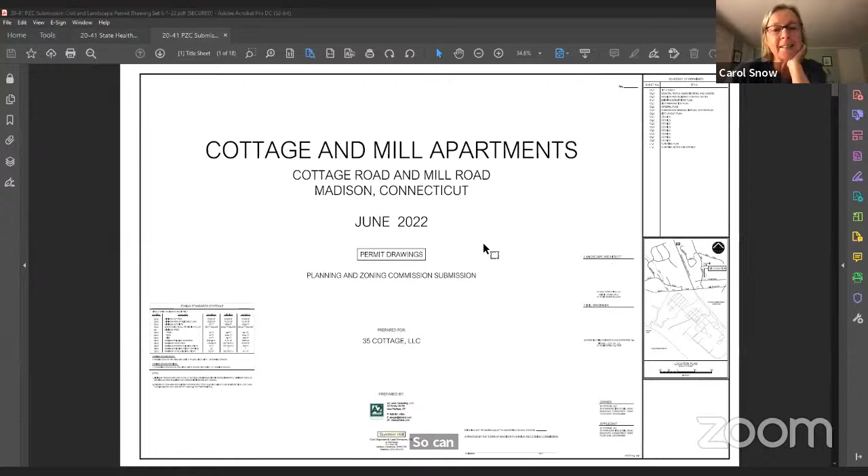Okay. So let me just scroll to the general plan, which shows the overall site development. Oops, sorry about that. It's not what I wanted. Okay, so the area of the site that drains to the pond, I'll roughly trace with my cursor if you can see it, and you'll see automatically that it's the major area of the site. Right. We understand that. Well, I just need to get this on the record, the question.

So that area that I just traced, obviously the major portion of the site, is what goes to the pond. Right. This little triangular area here, a little piece up here, I think, and a little bit here, they all go out to either Cottage or Mill Road. Okay. But your table only deals with catchment 2. And I was asking how much of catchment 2 is the 5,410 square feet that you use for catchments to send to Cottage Road?

Can you repeat that? Okay, so you give us table 3, which is catchment area 2 peak discharge summary. But then you say we're ignoring catchments 3, 4, and 5 because they're such small areas. Right, for the purpose of analysis, correct. All right. But you do give a square footage of the total catchment area of 5,410 square

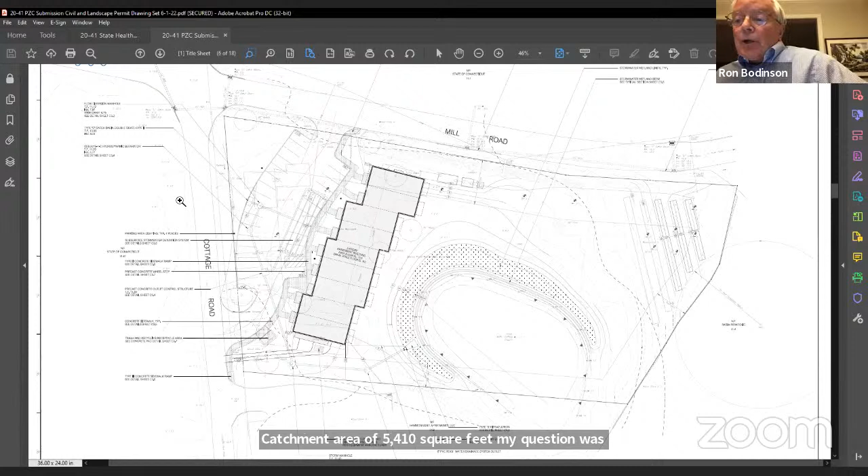feet. And my only question was, since you're concentrated in area 2, I guess that has the lion's share of that 5,410 square feet. No, sir, that's not correct. I think you're missing it. Let me open the stormwater management report if I could. Well, it says hydrologic models for catchment areas 3, 4, and 5 were not developed given their small areas.

Are there areas bigger than catchment 2, which was developed? That would seem odd. No. So the area of catchment 2, as I recall, is about 1/4 of an acre. The 5,400 square feet is the sum of the smaller areas 3, 4, and 5. I misunderstood that. Okay, I didn't catch that.

And then, as I understand it, the peak discharge for catchment 2 in a 2-year event is 1/10 of a cubic foot per second. Is that correct? Yes. It's not even 1 cubic foot per second, it's 1/10. Correct? How much water is in 1/10 cubic foot per second? A little, it depends on the duration of the storm. You have to put the time factor into it.

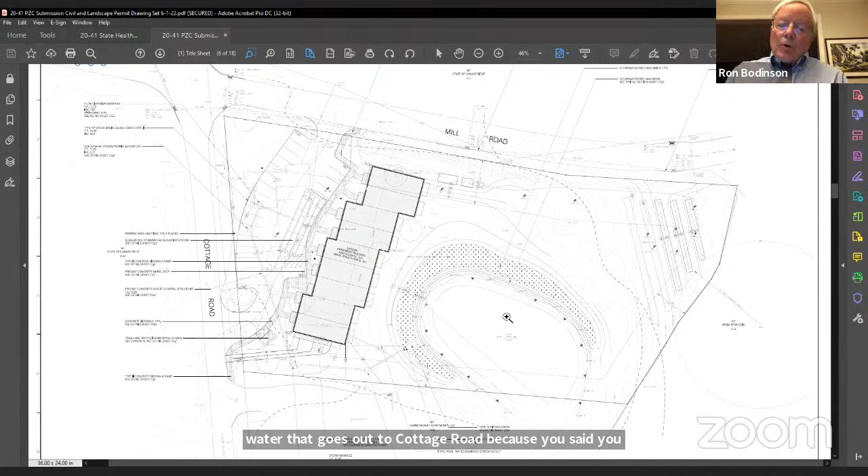And as I understand your table 3, the peak discharge is 1/10 of a cubic foot per second. It's your table, and that's for a 2-year interval. That must be some rain that only happens every 2 years or something. No. Okay, so if it's only 1/10 of a cubic foot per second, every table I've looked up says that's less than a gallon. Does that sound right to you?

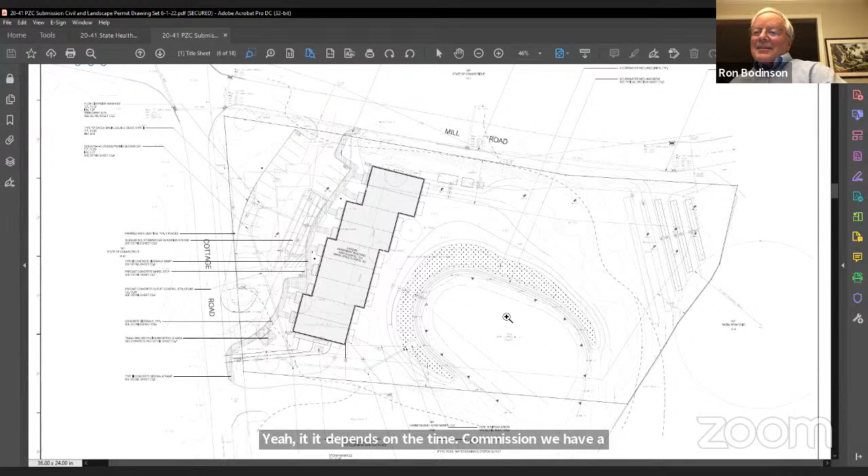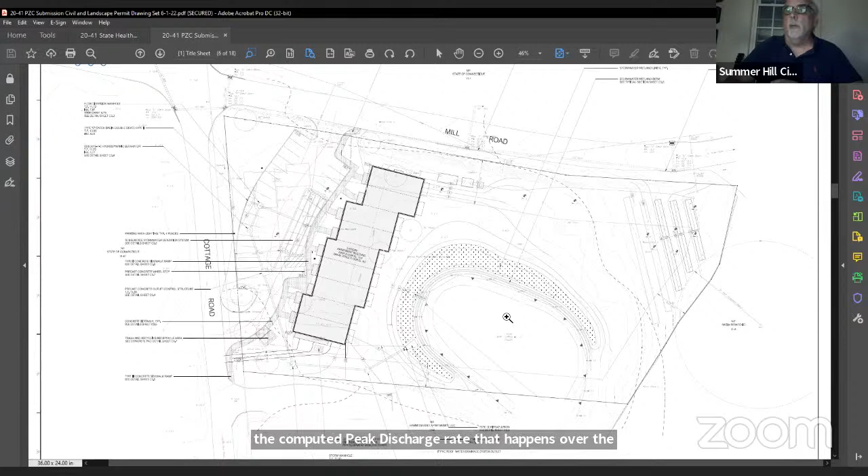Well, Commissioner, it depends on the time. We have a time. It's a second. No, you're not interpreting this correctly. The 1/10 of a cubic foot per second is a peak discharge. It's the computed peak discharge rate that happens over the entire time interval of a rainfall event, which is 24 hours. Are you saying that in 24 hours, only 1/10 of a cubic foot of water goes into Cottage Road?

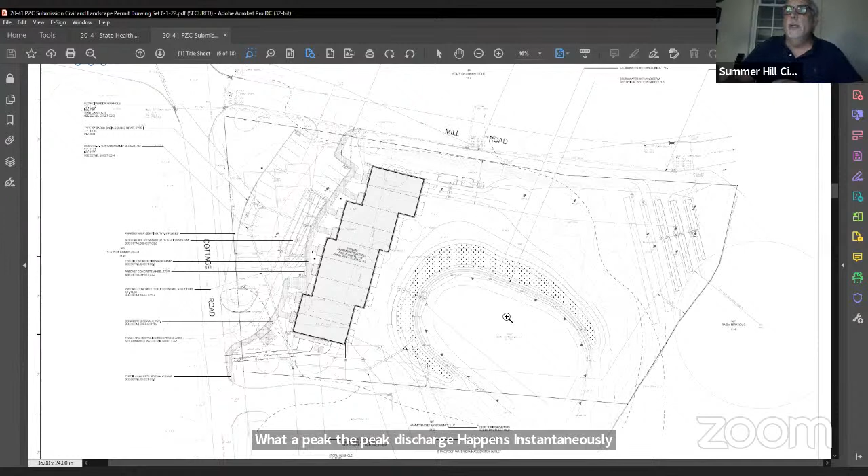No, I'm not. I'm not sure this is the right forum to do this, because this would take a lot of explanation. But the peak discharge happens instantaneously. During the rest of the rainfall event, the discharge is lower at any point in time. Well, I can understand that, but maybe a peak discharge in a 10-hour rain only lasts 1 second. But I don't think that comports with our common sense.

Just for the record, let me say 2 things, please. For the record, that's not what I said. Okay, I misunderstood it. And second, also for the record, I can tell that this conversation is going to get extremely convoluted. So let me explain, if I could, just very briefly. Well, let me interrupt a second. Maybe you're not understanding what I'm getting at.

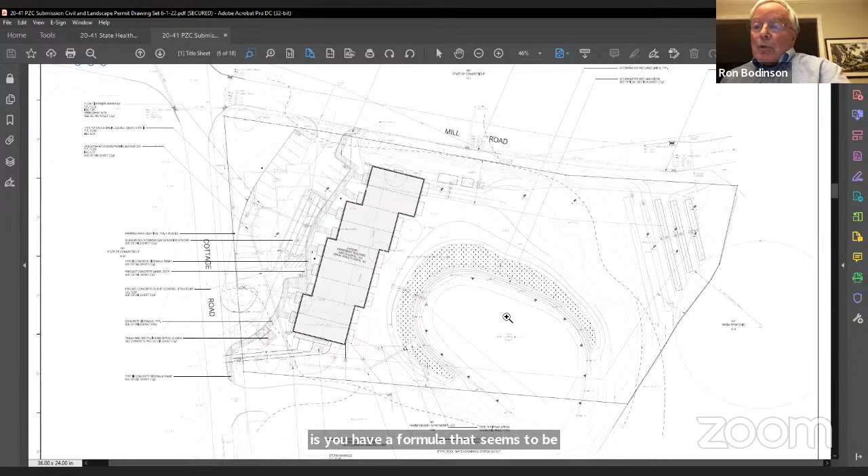You're saying that you're discharging stormwater to Cottage Road. You haven't told us how much water that is. You have a formula that seems to be 1/10 of a cubic foot per second. Are you saying you cannot convert that to gallons and no one knows how much water is going out there? Might be 10 gallons, might be 1,000,000 gallons. No, I'm not saying that at all. Absolutely, I am not saying that.

Let me say this though, if I could, and I said this in the past. And this is my professional opinion as a licensed professional engineer. There is a very small area of land from this site that will direct surface water runoff to Cottage Road and to Mill Road. It's approximately 5,400 square feet in area.

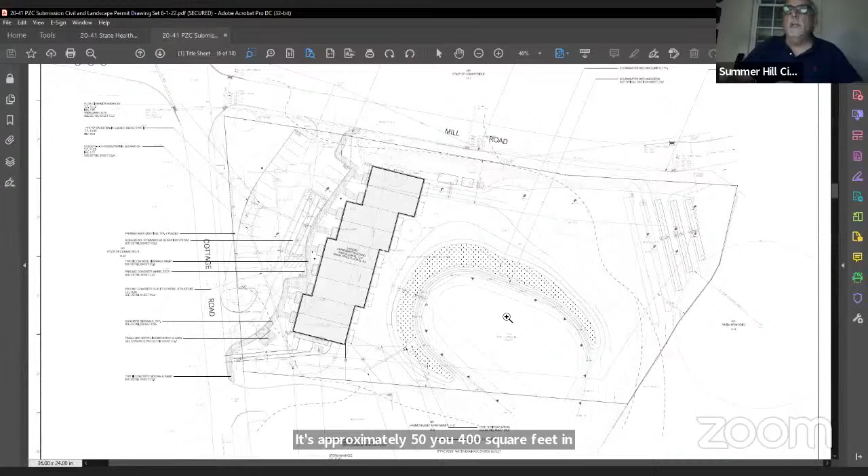Only, as I recall, and I don't have it in front of me, only about 1,400 feet of that 5,400 feet is impervious surface. The remainder of the 5,400 feet is either lawn or planted landscaped areas. That total area, 5,400 square feet, given its 3 different types of ground cover percentage, is so small that to model it would produce inaccurate results. It's much too small.

There is no adverse, and I'm saying this for the record, there is no adverse impact, in my professional opinion, from allowing 5,400 square feet of land area where the majority of it is lawn or landscaped area to go out to the Cottage and Mill Road intersections, because the only adverse impact could be that the drainage system inlets can't accept the runoff, or that the storm sewers can't accept the runoff.

And drainage inlets and storm sewers are designed based on peak discharges. And the peak discharge is too low to be able to impact the municipal roadway storm drainage system. That's the statement I made last time. That's what the report says. And that's what I'm... Yeah.

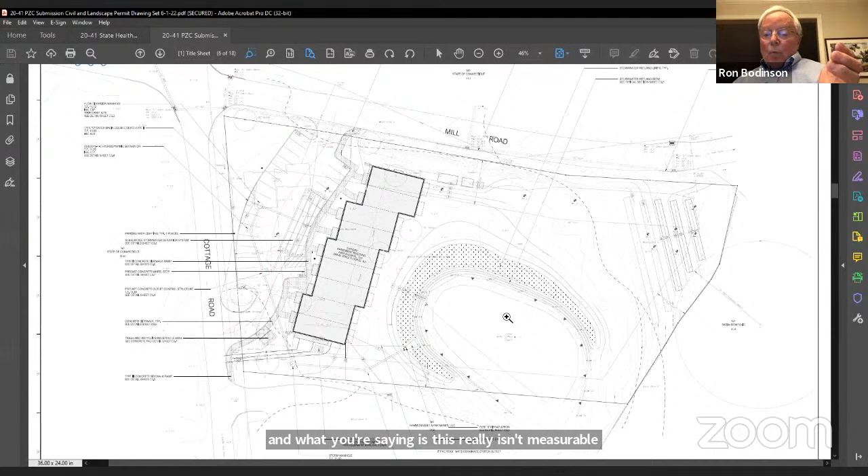And what you're saying is this really isn't measurable under your chart, that if I say 1/10 of a cubic foot per second under every Google chart you can find is less than a gallon, 3/4 of a gallon, you're saying that's irrelevant because nobody knows how much water is going out there. No, that's... All right, then tell me how much water is going out there in 5 hours when there's an event of 1/10 of a cubic foot per second.

Honestly, Mr. Bodinson, you've said so many things that I don't, and I'm not trying to be disrespectful. It's very difficult to answer your question, but let me say this. You can compute the volume of surface water runoff during a specific storm event that will go out to Cottage Road. I can compute that, be glad to compute it. I can't answer it for you right now. But that's really all I can say. The statements you've made are just, and I know this is not what you do, and I'm not trying to be mean, but they just don't make sense.

Okay, so I'm not sure what statement I made other than I ran rivers and paid attention to cubic feet per second. I was just trying to suggest that you have not given us that information. Apparently, we cannot find it in your report. You said you could compute it, but I'm wondering, can another engineer, based upon what you've done, using your peak discharge of 1/10 of a cubic foot per second, using a recurrence interval of 2 years, would any other engineer in the country also be able to compute how much water is going out on Cottage Road?

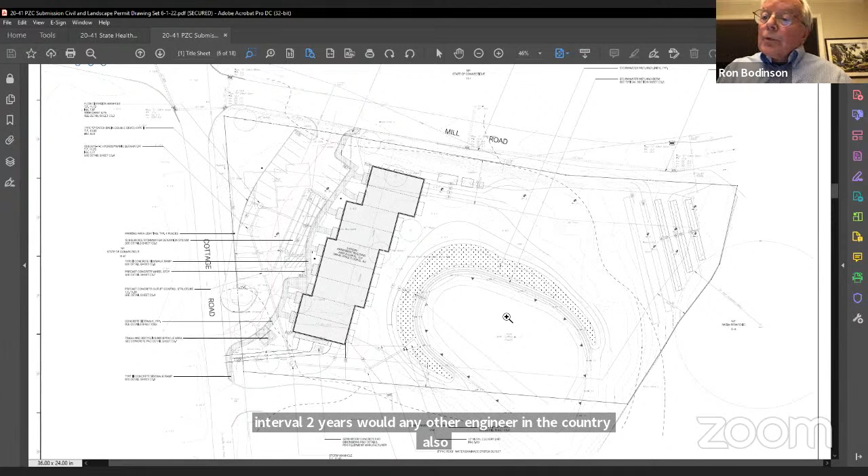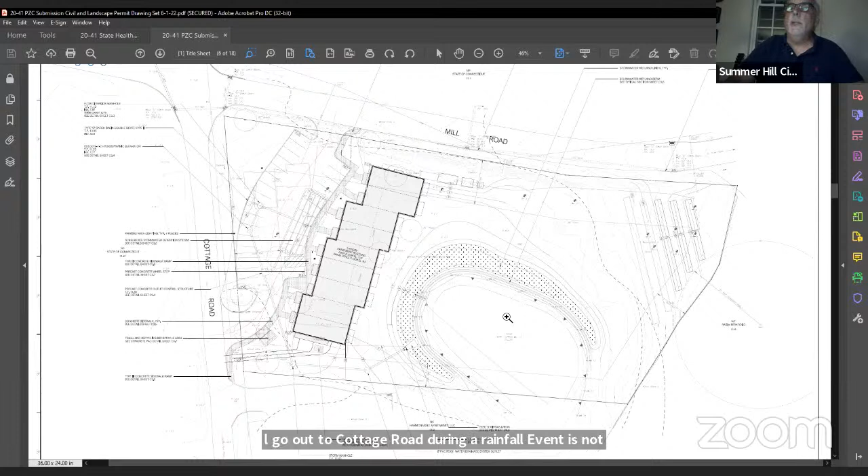Yes, and again, it's not based on the peak. The volume of water that will go out to Cottage Road during a rainfall event is not related to the rate of peak discharge. It's related to volume of surface water runoff that happens during the time period of the rainfall event. And have you given us that information? I would be glad to compute that. Absolutely. My question is, can any other engineer compute it based upon the report you've submitted? Absolutely. Okay, so all the information's there to be done is what you're representing to us.

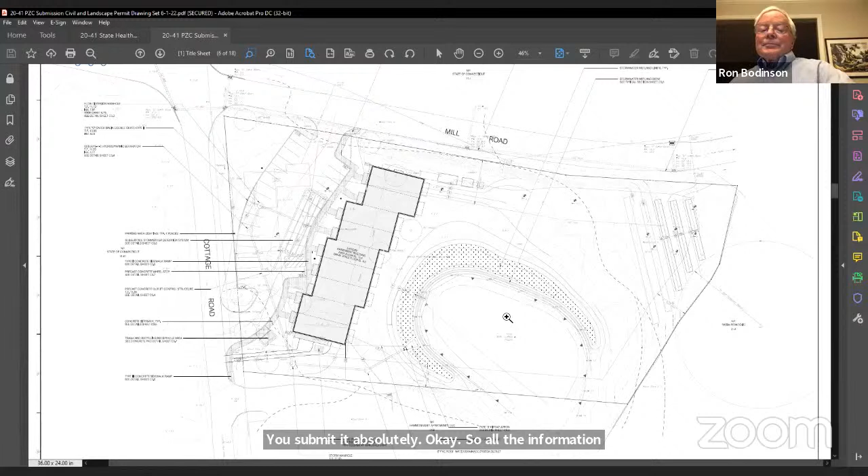Yes, sir. Okay, good. And that my simple-minded approach of 1/10 of a cubic foot per second, and then that's a gallon, and 60 seconds later it's 45 gallons, an hour later is 2,600 gallons, doesn't work. You need an engineer to figure it out. You don't need an engineer, but unfortunately, Mr. Bodinson, don't take this the wrong way. You would fail Hydrology One.

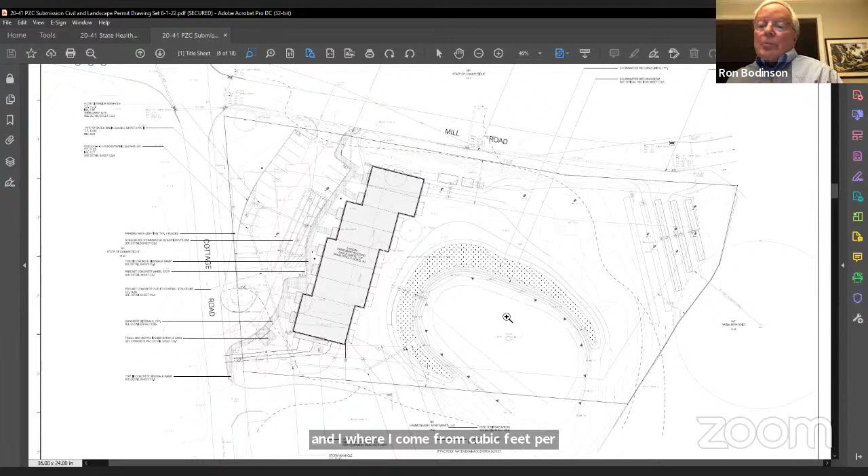I'm sure I would, and it simply doesn't work. I misunderstood that where I come from, cubic feet per second in discharge is calculable once you know the cubic feet per second, but apparently it isn't in this situation. So, okay, it's an unknown quantity at the moment. Thank you.

Okay, thank you, everyone. I think if there are no further questions, should we open it up then to public response to new information? I ask that we don't rehash topics and issues that have already been covered in our previous two meetings, if at all possible. I think we've answered a lot of those and resolved a lot of those. So if we could open it up to the public, Erin, that'd be great.

Yes, Madam Chair, I have one individual with their hand raised, Rasim Feratovic. Want to speak again. Mr. Feratovic? Yes, you hear me? Yes, we can hear you. Thank you. Good evening, everybody. My question for the engineer. Excuse me, Mr. Feratovic, could you please identify yourself with your address for the record? I am 42 Mill Road.

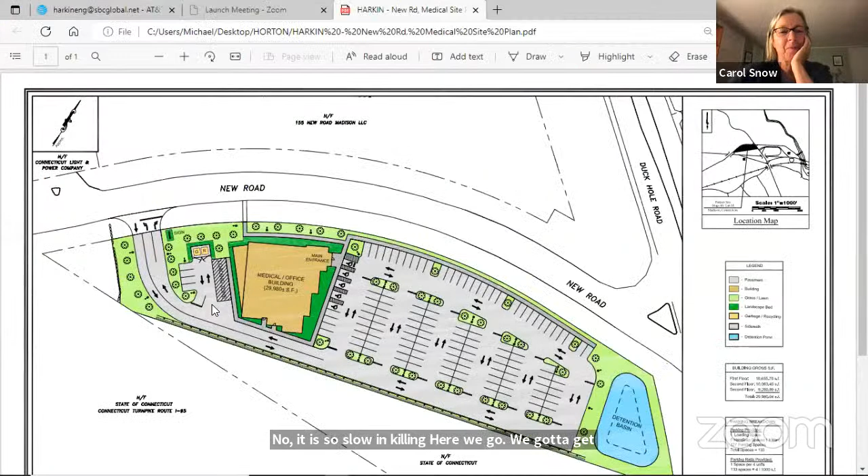Aaron has been kind enough to... Let's see what I got here. Make me a presenter. And just bear with me one second, the drawing will load. Out in the country, we're a little slow here with the internet speed. Should be up any second. There you go. Can everybody see that? Not yet. No, figures. How about now? No. It is so slow in Killingworth, Connecticut. Still loading. There we go. We got to get the horses moving to get the internet flowing. Okay, can everybody see that?

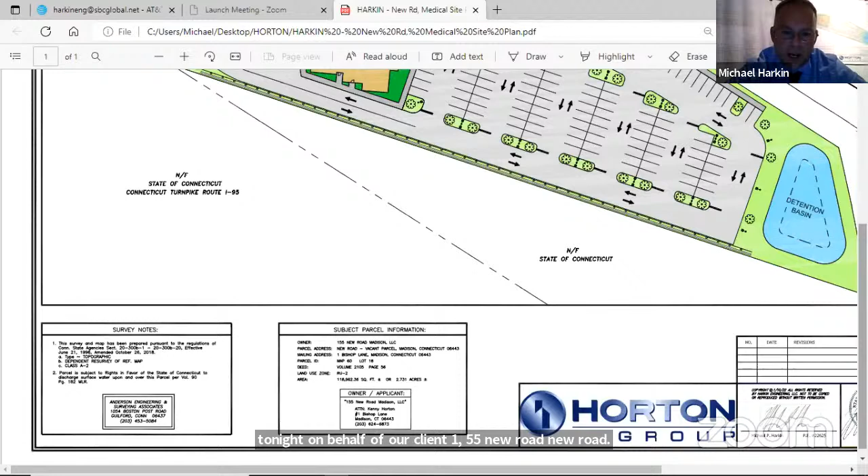Yes. Okay, very good. So again, guys, this is on the south side of New Road. I'm just going to zoom in a little bit. Again, we're here tonight on behalf of our client, 155 New Road, New Road Madison LLC, for their project on New Road. And we're just going to zoom in just to show you the subject parcel information. New Road, excuse me, abuts Duck Hole Road.

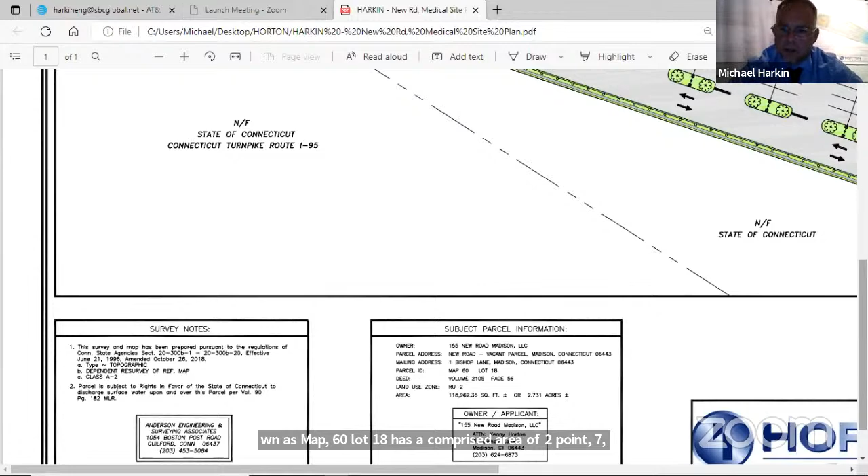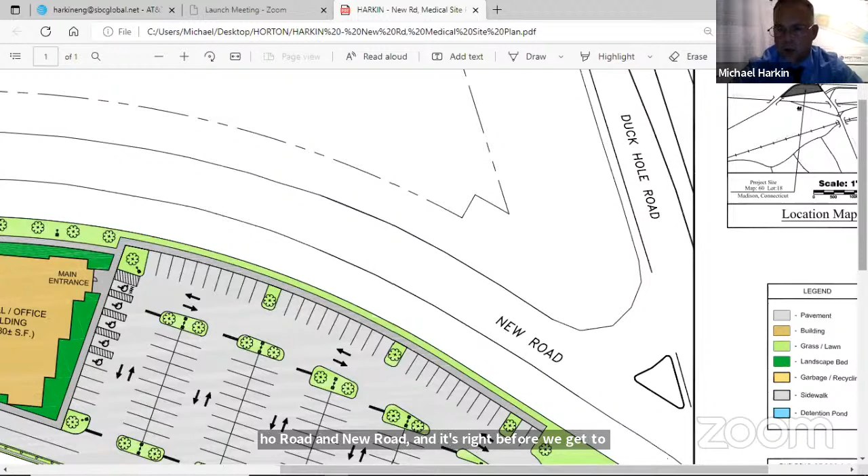This parcel is known as map 60, lot 18. Has a comprised area of 2.731 acres. And again, the owner slash applicant is 155 New Road Madison LLC. And as you know, the representative Kenny Horton is on with us tonight. This is right down the street from Town Hall. And it's right at the intersection that you can see here of Duck Hole Road and New Road. And it's right before we get to the on and off ramps on the Hammonasset connector. And to the north is directly the town hall.

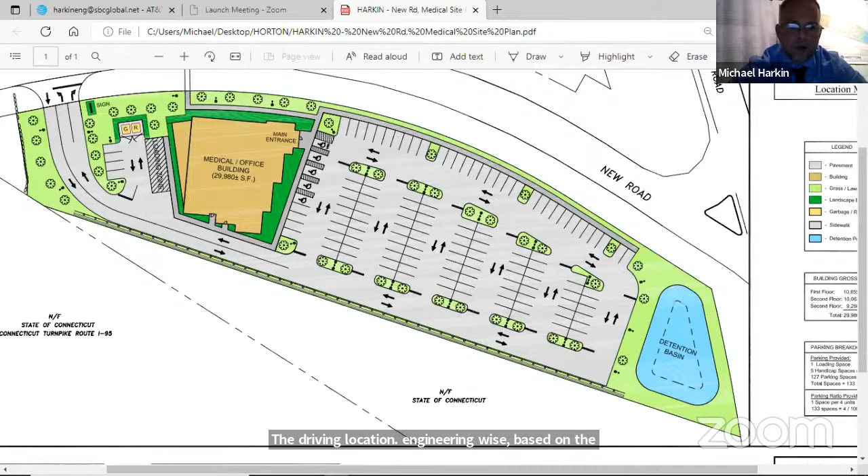So the parcel itself and the way the site has been designed is that the building, which is an office medical use, is located on the westerly section of the property. We selected the driveway location, engineering wise, based on the amount of sight distance we have for the cars coming and going off of Duck Hole Road and coming on New Road. Directly adjacent to our driveway entrance is the Connecticut Light and Power entrance on New Road. So basically, when we're at this intersection, we can see both westerly and easterly, the farthest portion.

If I was to move that driveway anywhere along this area, I would start to shortchange the view corridor in each section. So the best position for the driveway is as far west as we can, which you can see here. So we have a 12-foot wide entry lane entering the project. And as you can see in brown, we have the medical office building here. Off to the left side is really the loading zone and an area where people that are doing the maintenance on the building can park. We have recycling and refuse area, which is going to be screened.

It's easy, and the turning and swing distance have been made for a fire truck to pull in here, a tractor trailer truck to pull in here, and a garbage truck. They can all easily access that and make a full back out movement if need be. And it's also interesting enough when you get in here for circulation, the fire truck, the garbage truck, and everybody can circulate around. And if they wanted to pull directly in, they can come from this angle too. So as a potential person entering this facility and wants to utilize the main entrance, which is on the easterly portion of the building, they would come down this driveway and they would have the option of pulling into any one of these driveway stalls.

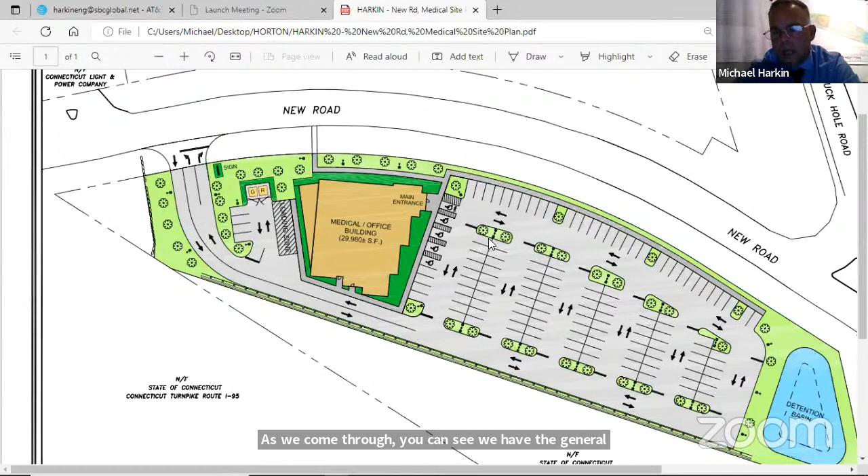As we come through, you can see we have the general parking area located throughout. We have the traffic islands, which will be landscaped. We have trees and site lighting in each one of those. And then to the southerly portion of the property line, we have a small retaining wall that runs along the length as well as guide rail.

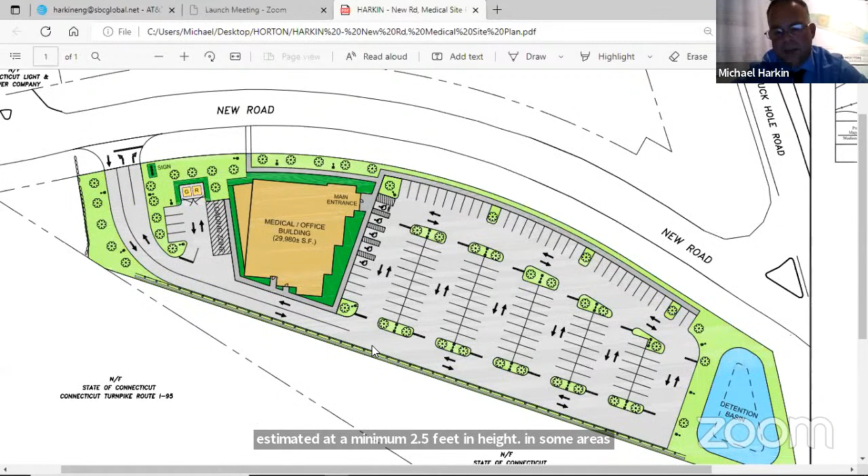And the reason for that is we're just trying to flatten out the grades and make this area as flat as possible for parking. The wall is estimated at a minimum 2.5 feet in height. In some areas, it might be 3. Again, that's just to prevent any grading onto the State of Connecticut property, which you can see here where my cursor is.

So the way the site is set up as far as drainage, all the area is pitching where my cursor is away from the building and headed to a large detention basin located in the easterly portion of the site. That detention basin is not only taking our site drainage, it's actually taking the drainage from Duck Hole Road and the town road of New Road. There's a set of catch basins that comes across and currently discharges on this parcel.

So what we basically did is we made this detention basin sufficient enough to have a 0 net increase in post-development runoff when the site's designed. Basically, the same amount of water flowing off the site now will be the same amount of water flowing off the site when this project is developed.

The septic system for the medical building will be located underneath the parking lot. It's important to note that there's beautiful sand and gravel Class A soils on this site. So it's very well draining. So as we come into the site again, we handled the storm drainage. We looked into the septic criteria. We looked into building placement. We also looked into traffic flows. We looked into stormwater management. And then we looked at traffic circulation.

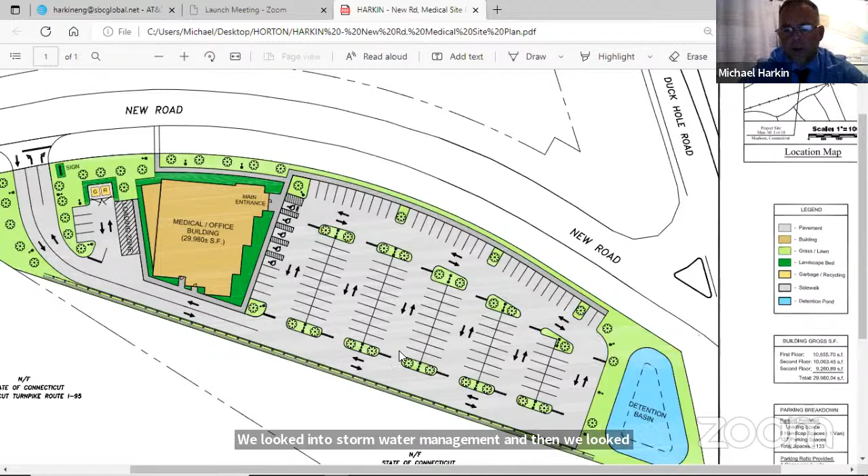Every one of these aisle widths are wide enough. They're 24 feet to circulate a tractor trailer or a fire truck through. And we have great traffic patterns throughout. You can see these little lines signify stop signs. So if you pull down this area, you have to stop, come around again, stop.

And then as you exit the subject site, you can see we have a double intersection, double turn lanes, I should say. One lane going to the left, to the west, which would be towards town. And then we have a right turn lane onto New Road, headed towards the connector in Duck Hole Road. So with that being said, that's the site plan in general.

The site sign would be pretty small, located in the driveway area. Again, remember, this is just a master plan. At the time of the finished product, we'll have a full detailed sign and sign application when we come through. Obviously, at that point, we would have full septic design and analysis and full detention basin.

Basically, what this map is showing is that we can accommodate all the requirements based on the planning and zoning regulations: the parking, the setbacks, the green area. You can see that the green area that we have shown is grass and landscaping. We've split up the parking areas with landscaped islands located throughout. And it just made it easier for the storm drainage to flow with the configuration that we have.

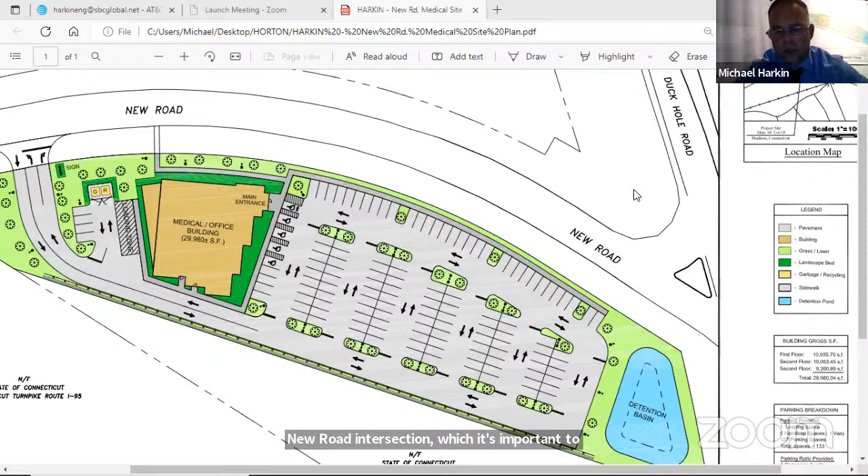So with that being said, this is a great position as we're at our driveway, you can either go left towards town, or take a right to head to the New Road, Duck Hole Road intersection, to turn this over to David Sullivan, our traffic engineer, to discuss this Duck Hole Road, New Road intersection. It's important to note that we've had many, many discussions over the last couple of years regarding this site and the site adjacent across the street. And one of the things that we've talked to town staff and Aaron brought up is to do a full detailed traffic analysis of this intersection.

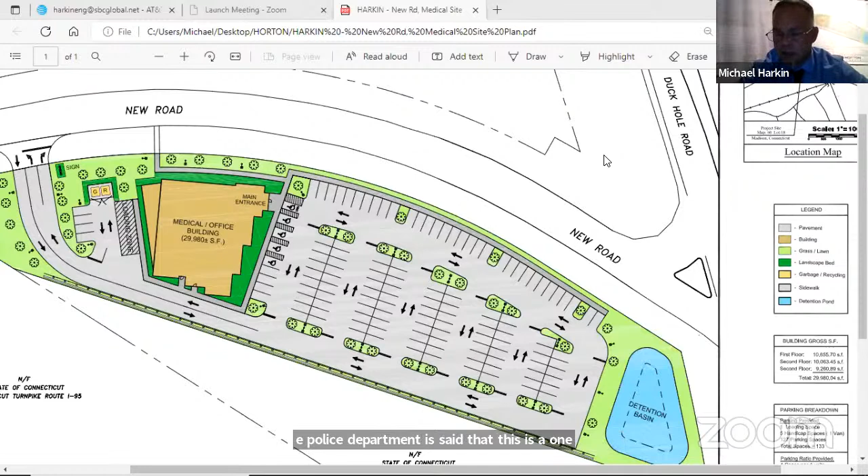We've sat down, we've talked to the police department. The police department has said that this is one area where there's a lot of accidents, and they also had us look into that. So we did hire Mr. Dave Sullivan to look into it. So without further ado, I will stop sharing my screen and be quiet for a little bit, and then turn it over to Dave Sullivan.

Thank you. Good evening, everyone. David Sullivan. I'm with SLR Consulting, and my offices are in New Haven. I manage the traffic and transportation planning group. If I may, I'll share my screen. I have a short presentation.

Let's see. I'll do that one. Okay. How's that? Everybody see that?

Yes, okay, great. So we did, as Michael indicated, a traffic evaluation, and we looked at really both phase one and phase two, but primarily at this point phase one, being the commercial portion. So we reviewed existing conditions, which included assembling new traffic counts for our analysis, but we also took a really hard look at the crash data in the area. Based on our initial reviews, we made some recommendations for the intersection of New Road, Duck Hole Road, and 450, the connector, the Hammonasset connector.

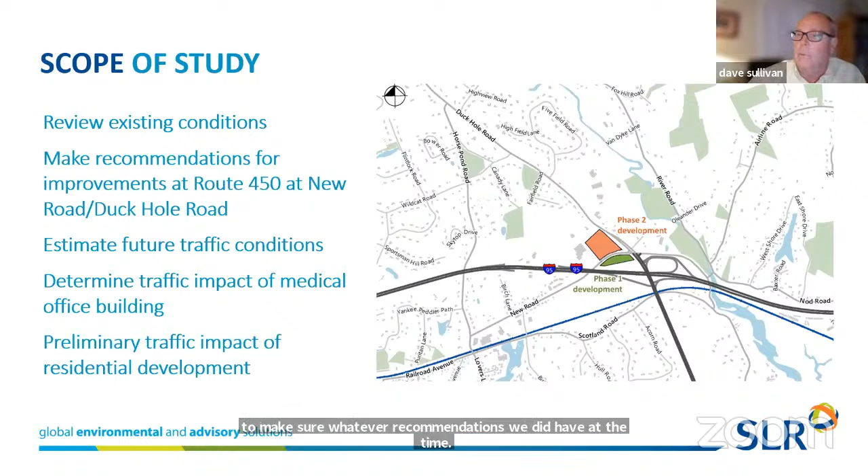Typically when we talk about the accident statistics in these, usually it's about a 10-second presentation, but I think it was important to really take a hard look at what the accidents were. To give you some idea, we looked at 3 years' worth of accident data, and we looked at it up and down Duck Hole Road and Hammonasset Connector. We also looked on New Road and focused a little bit on this intersection primarily.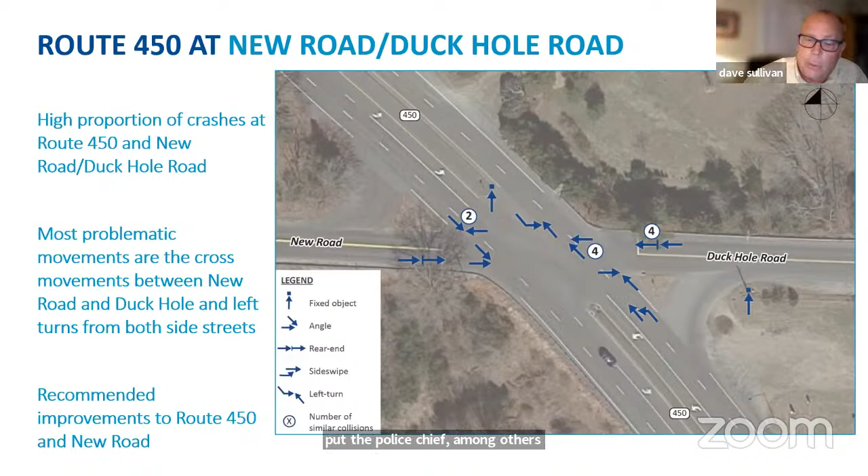So we looked at it. We did have some conversations. We talked to the police chief, among others, the town staff, and we came up with a recommendation that we think solves a lot of these problems. So essentially what we did is took the approach of let's eliminate the need to cross all of the main road at one time. So we split the intersections.

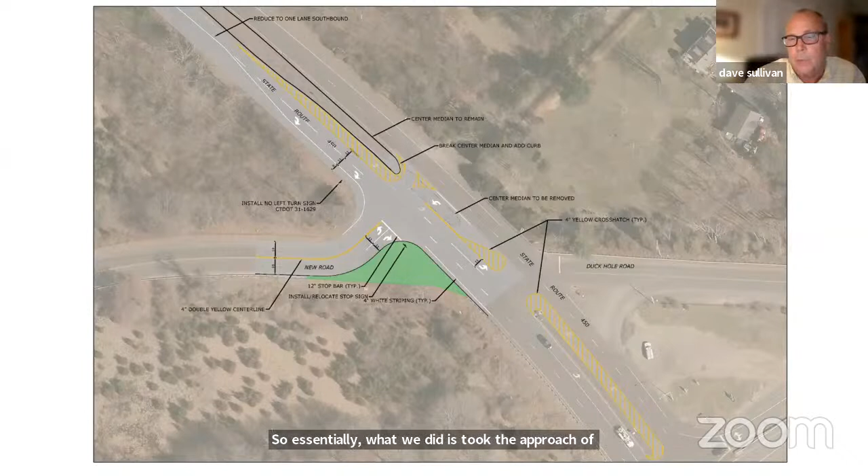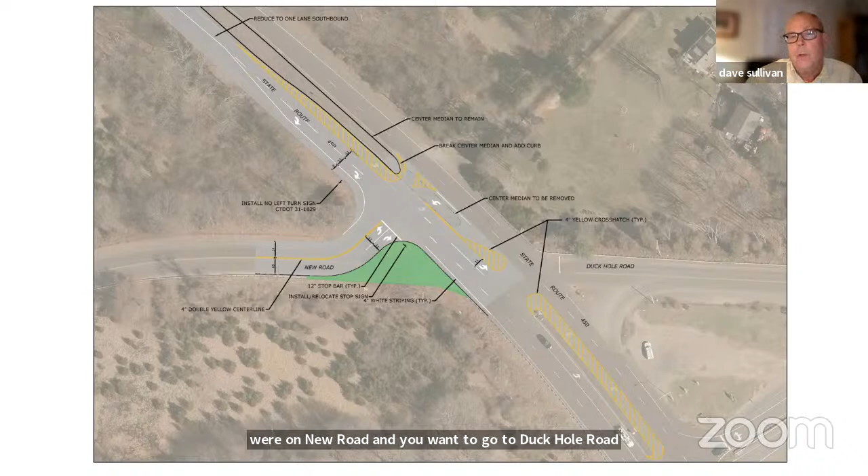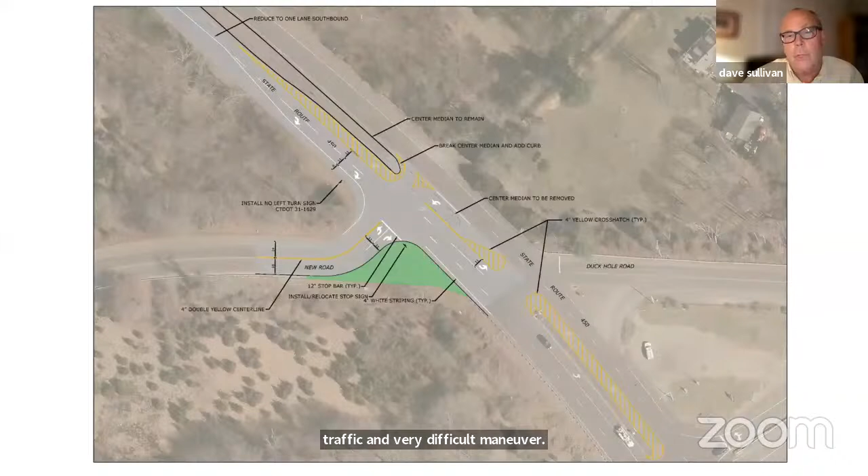So for example, if you were on New Road and you wanted to go to Duck Hole Road directly across the way, now you would cross on an angle, 7 lanes of traffic, a very difficult maneuver, a lot of pavement to traverse. So now you would take a right turn only. So you would take the first stage of that movement and then sit in a new left turn lane. So you would take a right turn, get into the left turn, and then you would take the second part of that maneuver, much safer, because you're not trying to negotiate traffic in both directions, plus this big open area that exists in the middle.

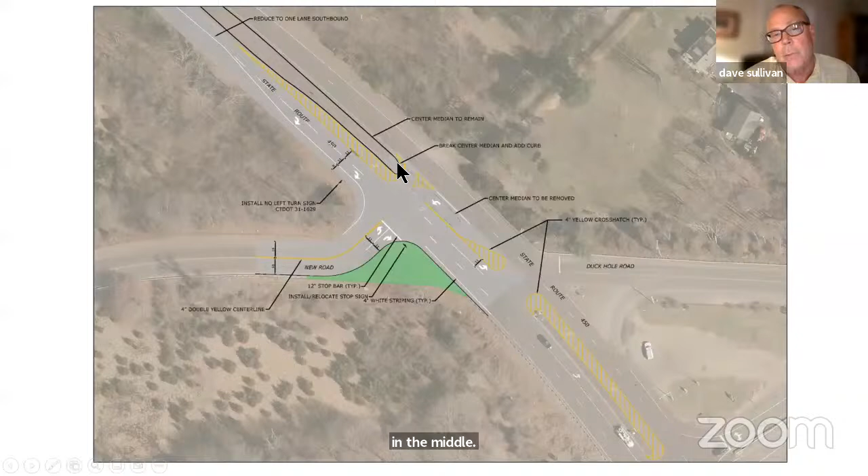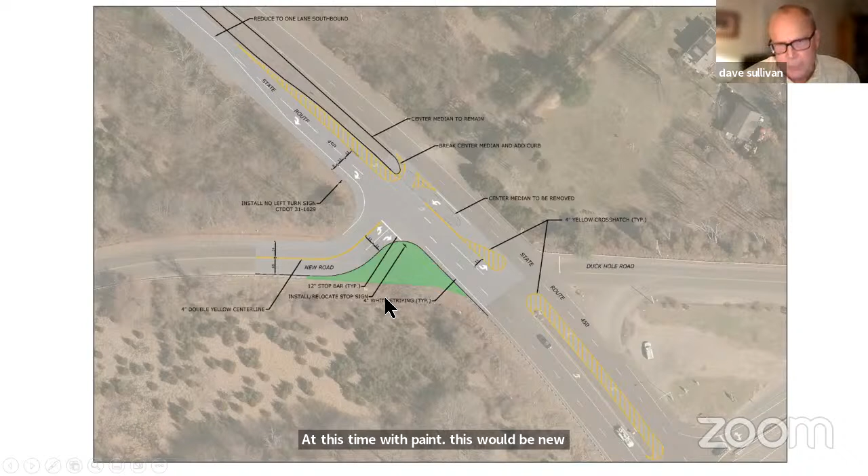To do this, we'd have to make some modifications, physically cut back the raised median here, and we recommend doing the rest of it at this time with paint. This would be new curbing and some landscaping on this corner here. So this is a concept we're recommending.

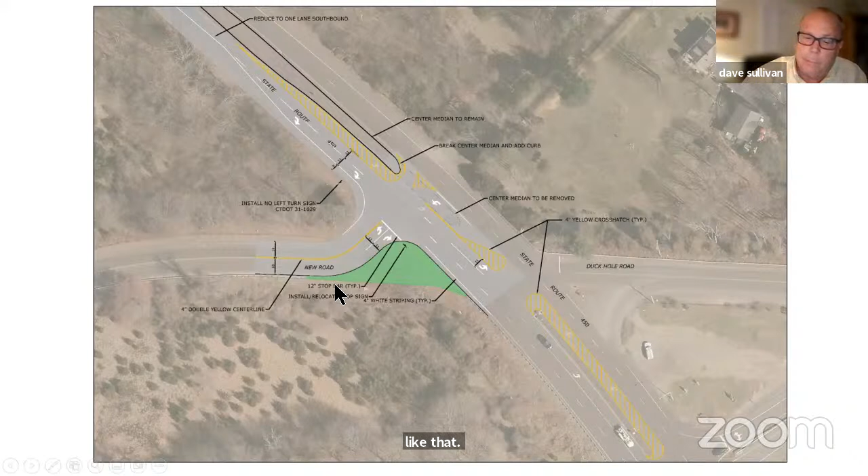We've mentioned it to the owners. They're willing to do something like this, but of course it is a state highway, and this improvement would have to be vetted through DOT, through your town local traffic authority and things like that. But this is something that we think is very viable and a very positive improvement out here.

So getting to some of the more traditional stuff, the traffic volumes that would be generated by the commercial medical office piece would be 93 trips in the morning, 117 in the afternoon peak hour. And again, this is based on Institute of Transportation Engineers basic statistical information. We have done a number of these. Some of these have been built recently, and we found these numbers to be conservative for Connecticut, particularly along the shoreline.

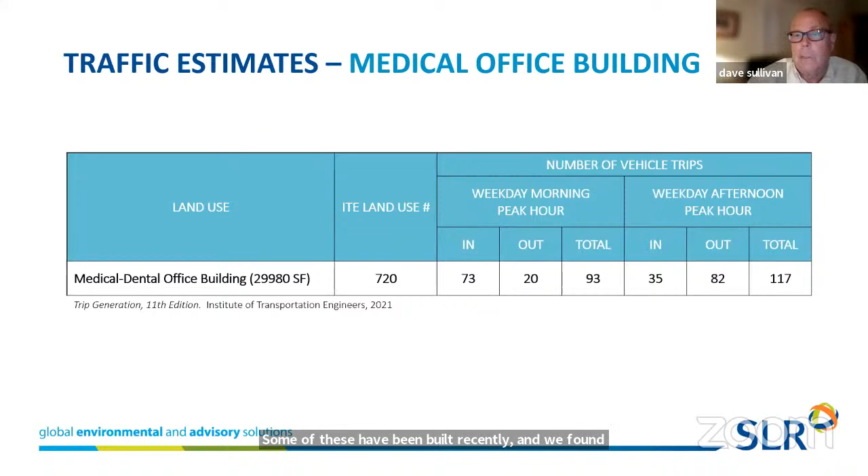I won't go through all of this. This is in our report. There's two things I'd like to point out. One is in the green, that's the intersection of New Road and Duck Hole Road at the unimproved intersection. I'll point out the westbound left through right. You can see that movement is operating at level of service F in the morning and D and E in the afternoon. So that's a poor level of service movement. It functions, but it's not great.

When we go to the blue here, the blue is under the new configuration. And under that configuration, we essentially have two intersections. One is at New Road. The second intersection to the south is at Duck Hole Road. But what's important is we now no longer have these D's, E's, and F's. All of the movements and approaches with the improvement would be at levels of service A, B and C. So a significant improvement from a safety standpoint, but also from an operational standpoint. The remainder of our analysis intersections, we see no change in the levels of service.

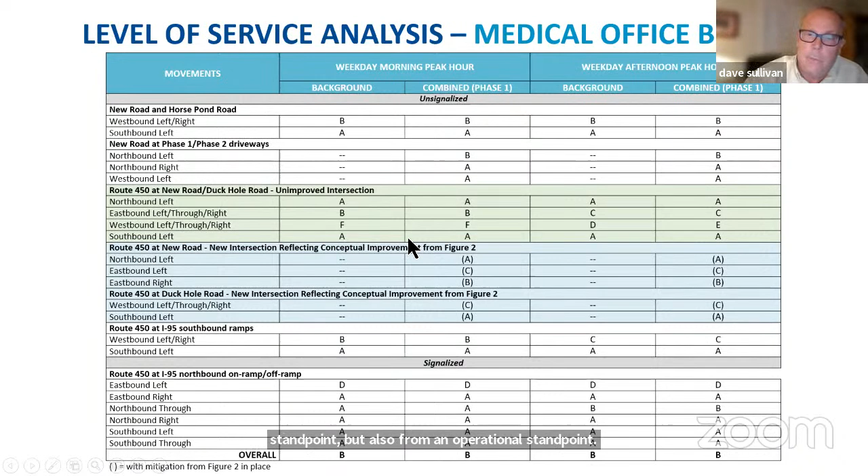So in conclusion, without the mitigation, levels of service would generally remain the same. And I did mention the Duck Hole Road westbound approach, level of service D to E in the afternoon, level of service F in the morning. However, with the intersection improvements, the safety and the operations can be improved. We would have to coordinate with DOT, the local traffic authority, and town staff regarding the improvements. And by doing so, we can improve the levels of service, particularly coming off of Duck Hole Road, to C from that level of service F.

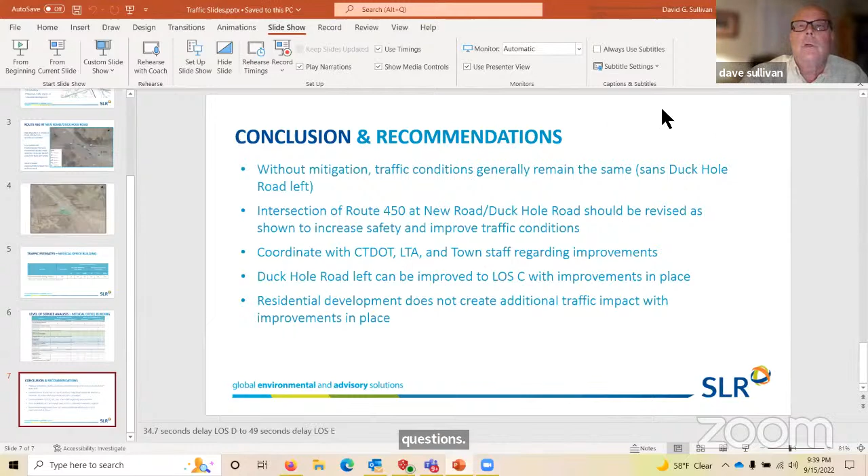And lastly, we tested what happens if we add the traffic for phase 2, the residential development, and essentially the same results in terms of level of service were found. So with that being said, I will be happy to take any questions, or I'll just pass this back. I'll stop my share.

No questions. I'm ready to roll. If I can share my screen. Aaron, yeah. Let's see. I guess this would be.

All right, I'm showing an aerial. As everyone talked about, the building is 29,980 square feet. It's 3 stories and located on the high side of the site, which is here. The closest properties that we use for context would be the Eversource, CL&P, and the 2 service centers on 95. And the context of 95 is also part of the design and building.

The building itself is a medical office with 3 floors, the largest floor being at the grade level of 10,655 square feet. And they get progressively smaller as you move up to the 3rd floor, which is 9,200 feet, with a design scheme of using smaller architectural elements to identify certain portions of the building, and those extend up beyond the parapet roof.

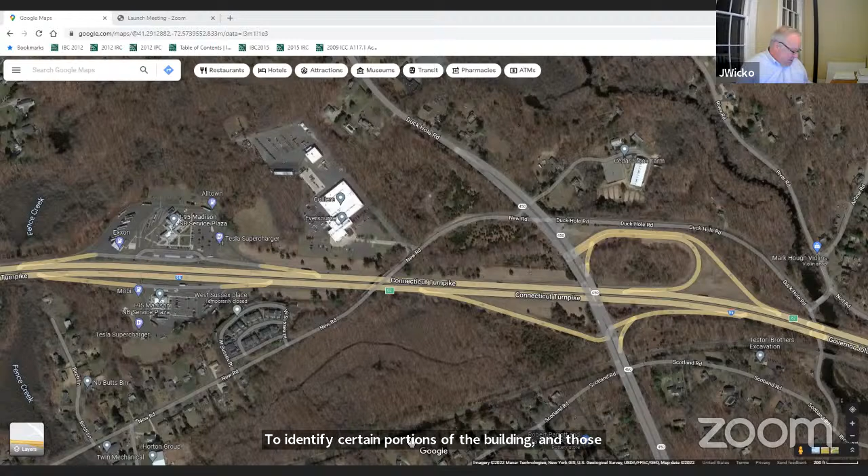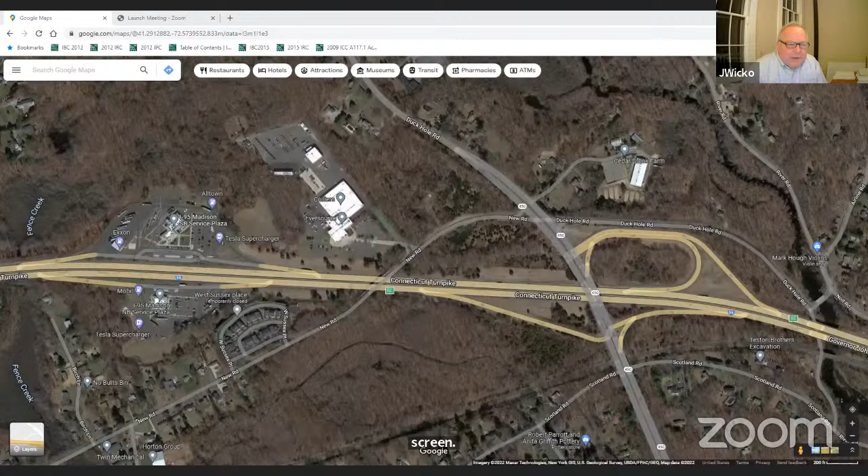Excuse me, John. Yes. We're still looking at the aerial view. Oh, okay. Let me. It was new to me. I had to select the screen, so I need to get back to the share screen, which I'm not sure how to do. Actually, I don't see it. You need the red stop share. Oh, here it is. Okay. So stop share. Then I need to go to that one. Okay, thank you, Marjorie. Welcome.

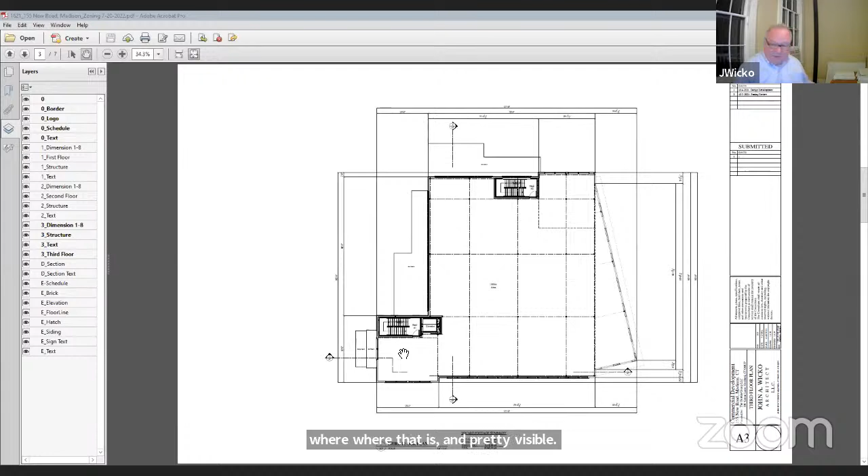Is that good? Yes. So we're at the building now, the PDF, first floor, second and third floor. The entrance, which I think Mike was pretty clear about, is pretty visible in that northeast corner as you're approaching up from the highway interchange, and also the major parking lot.

I guess I'll have to do this again. Sorry, I have so many things to show you. I can't wait. Okay. Let's see, there's a video I made, and I don't see it. Well, let me try that. Show all windows.

John, I think if you share the screen on the upper left side, it will give you your whole desktop, and you'll be able to use it like your computer. Okay.

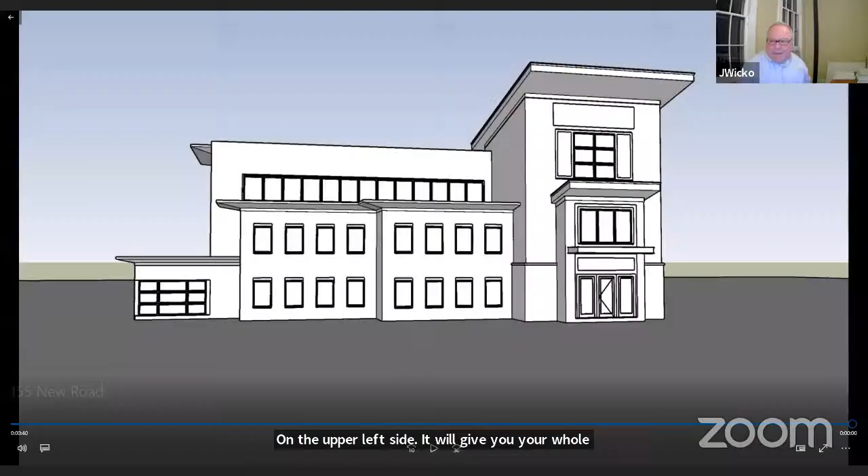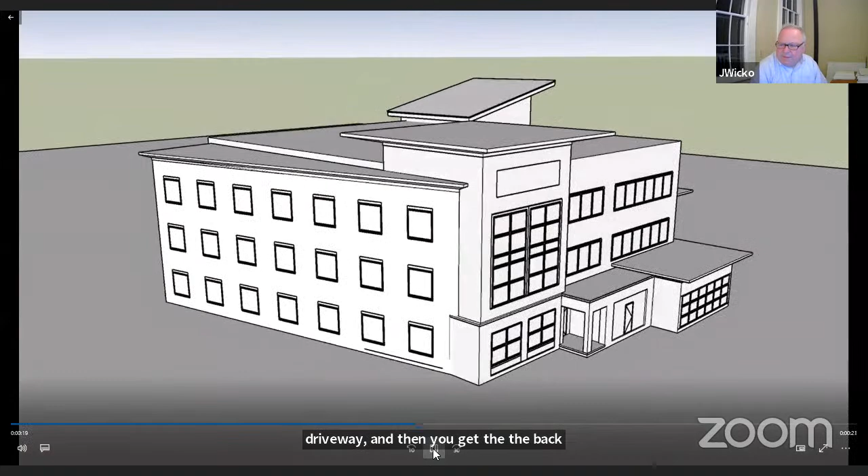Okay, I've got that. So I've got a little animation of the building as you're coming up from New Road and the front of the building at New Road. And then this facade is when you're entering the driveway, and then you get the backside, which would really front 95, which has a big presence, and then as you're driving around, you're going into the parking lot, and you get the frontal view of the entrance and some more of the architecture that we've designed.

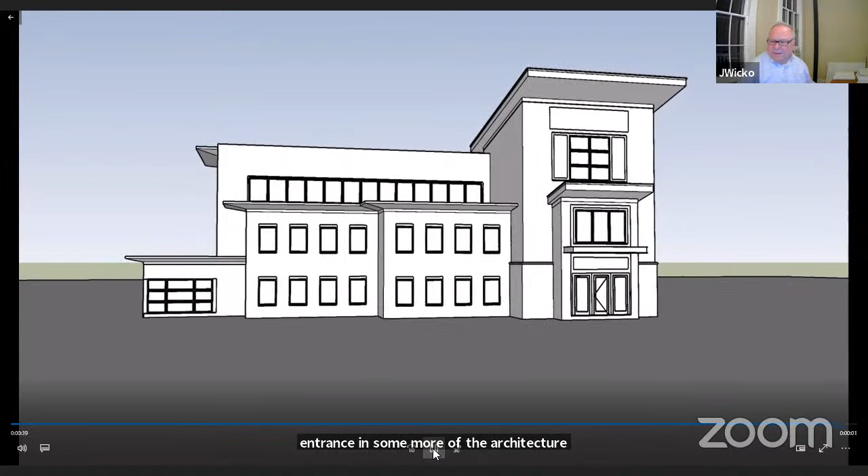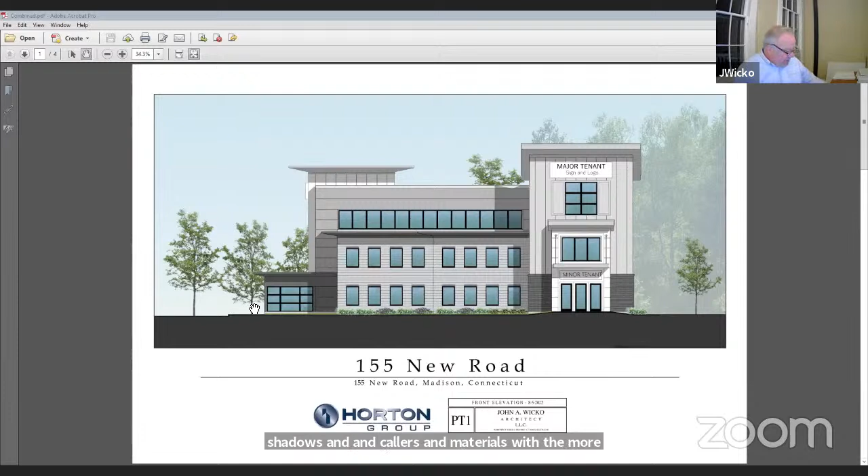And let's see. I'm going to skip that, and I'm going to go to the color elevations, which here we are. And this is a rendition of the building with the shadows and colors and materials with the more realistic setting. Architecturally, the building is designed with this main central box, which is in this gray material. And then, like I said, we have some architectural features that will identify different sections of the building.

The corners, this is the entrance, also seen from New Road in the parking lot. And then one of the other towers, which is visible from 95, they have some vertical siding, metal panels is what we're proposing. We incorporated a gray brick at the base to kind of anchor the 3-story building and have some smaller scale where the pedestrian is. We have building elements that kind of intersect and attach to the main rectangle, and we've used primarily a horizontal plank siding that identifies those elements.

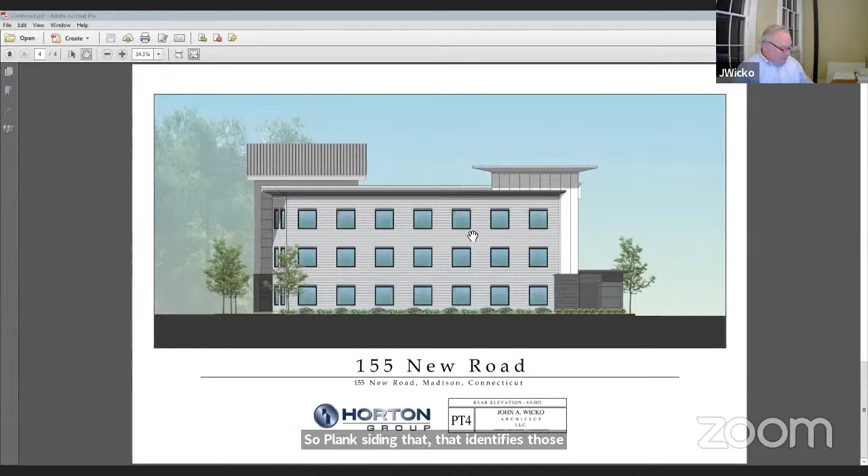And doors and windows are high-grade commercial items that you can see are rendered in black. And so the exposed angular roofs and some of the small architectural roofs, we're going to clad in a galvalume. It's kind of a silver metal, and the rest of the roofs will be EPDM flat roof, which you don't see, but is very durable.

The height of the building is, I'm not going to bounce around to the architecturals, but all this information is on the PDFs. The height of the building, this main box is 41 feet, 6 inches. And these elements, the entry tower is 54 feet to the very top, and 47 foot is the height of this element, which is on the back side, I'm calling it. The allowable maximum in this district is 60 feet. So we're under those.

That basically describes the building. I could get further into the design elements. I have a three-dimensional view that I could use if we have any further questions about the building, and we can spin the building around if you're interested. But that describes the building pretty well at this level. You can turn it up. I'm sorry. Okay, yeah, if you have any questions, I'd love to entertain them.

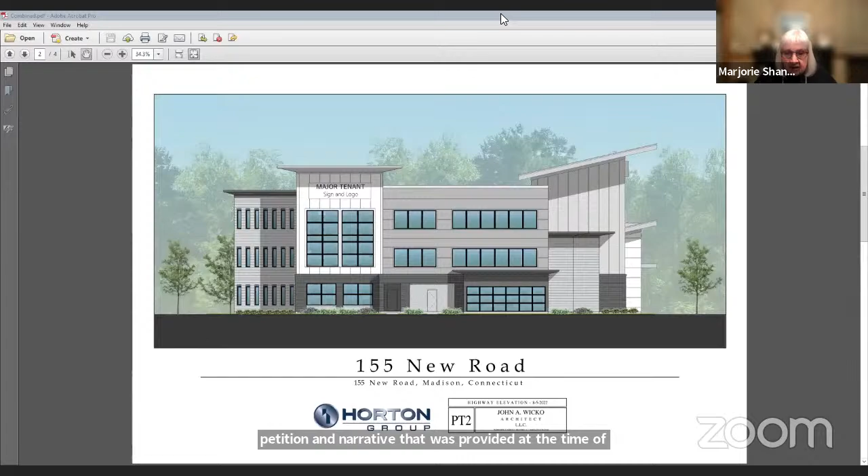Madam Chair, this is Attorney Shansky. I would call the commission's attention to the actual petition and narrative that was provided at the time of the submission. It goes through the utility plans, and it also has a more detailed discussion of consistency with the requirements of Section 32 of the regulations and consistency with the Plan of Conservation and Development. And with that, and with thanks to my team of experts, that is the master plan that we're placing before the commission this evening.

Thank you. I do have a quick question. Phase 2, how many units are you thinking of for that residential building? How many units altogether? Yeah. Right now, again, we're only really talking about phase 1 at this juncture, but phase 2, I believe, is going to be about 42 units potentially. Okay, thanks. Just good to know for the traffic too.

Yes, and it's important to know, and Mr. Dave Sullivan can speak to that. That's why David took that into consideration with this traffic study. He took in phase 1 and phase 2. So we're only doing this really once, and we can fully design that intersection and improvements correctly. Thank you. Any other questions?

I had a question. Ron? Yeah, so maybe to the traffic engineer or the attorney or engineer. It strikes me we're sort of in the same situation. We have a plan, and the traffic engineer and the engineer have acknowledged there is a problem. The plans show it.

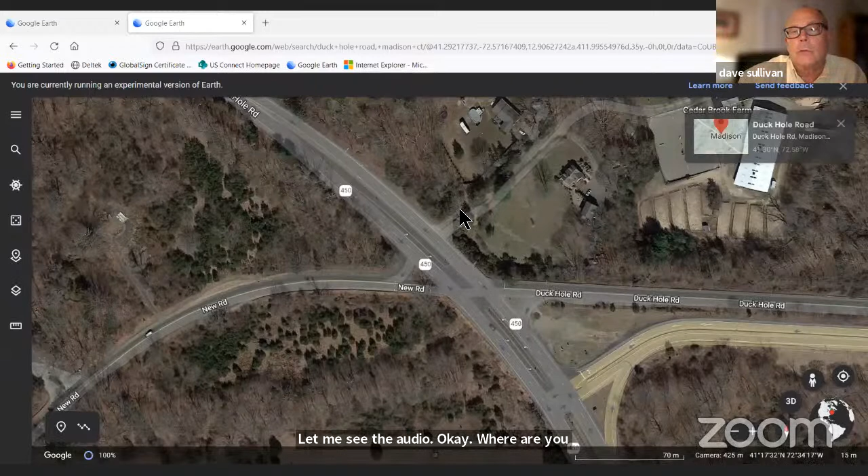Yeah, let me try to find out which parcel is yours. I pulled up an aerial while you were talking. Okay, can you see the aerial? Where are you talking about? Over across the street here? Yes, I don't know if you can hear me. Yeah, right there. That's my driveway.

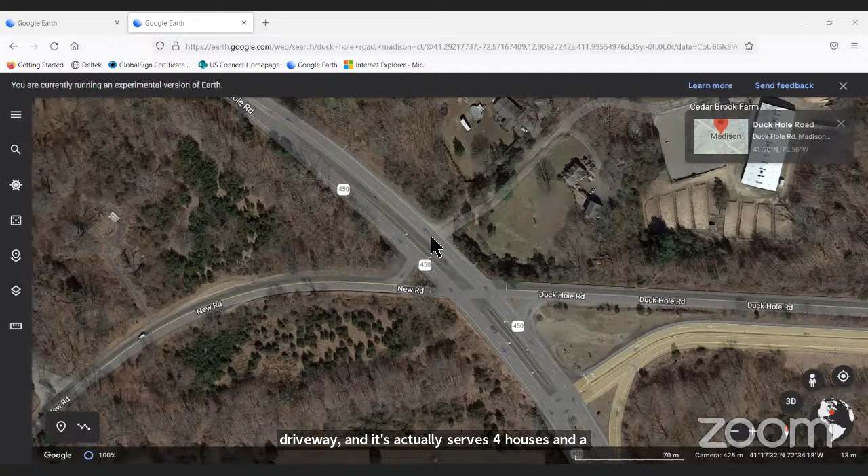It actually serves 4 houses and a riding school, which has large trucks, tractor trailers, and a lot of traffic every day. Okay. We are not impacting that. So right now you could take a right in and a right out. There's the median here. Correct. You have to go right and then do a U-turn at the end by 110, our other house, and then come back to town. Correct.

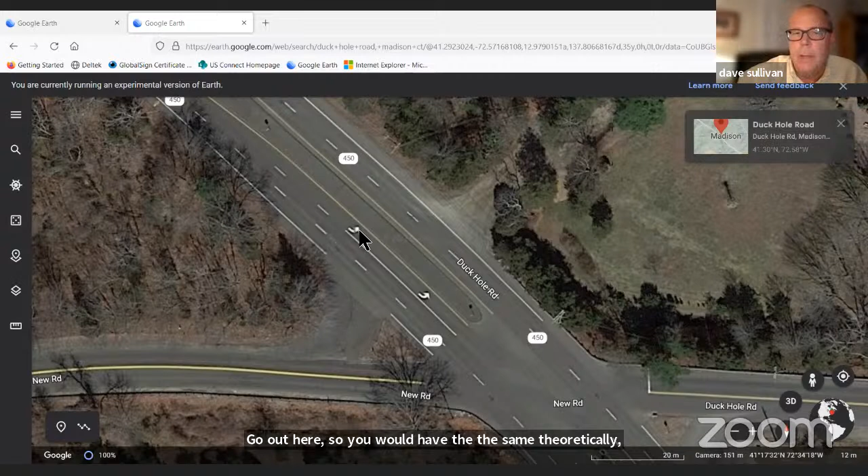As it stands now, we're cutting this median back to about here. So you would have theoretically the same. I suppose there would be some ability. Let me see if I can pull the improvement up again.

Sorry, I know it's late. It's okay.

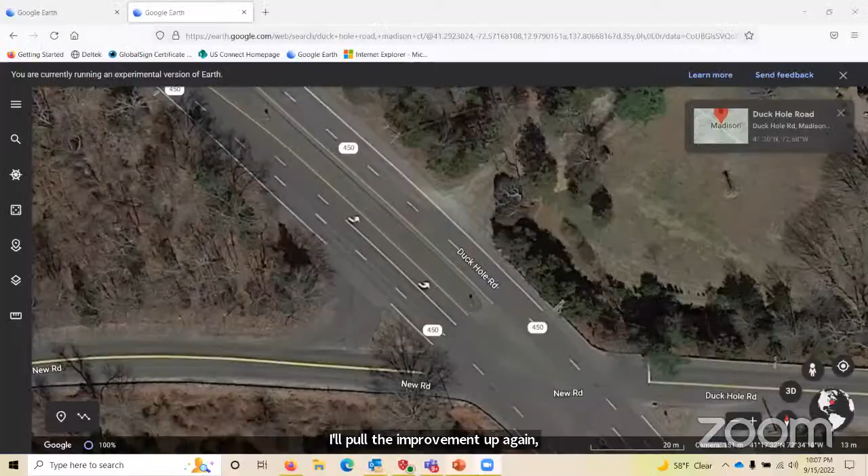Okay, so here's that driveway now. Under the improvement, you can see that the median is being proposed to be cut back. What we show here is a painted median, which would basically tell you as you're approaching it, you should take a right turn out. Now, there wouldn't be a raised median there physically stopping you, but the intention here was to maintain the existing movements that you have today and not change that.

The only issue I see there is I'd have to go straight across that to get to my driveway. I'd have to cross all four, similarly to what we do now, but we'll have to stop in that left turn lane from northbound 450. From here? Yeah, cars will be stopped right there to take a left on New Road, and we'll have to go straight across. Well, I mean, theoretically, you would be taking that today up here. Yep. And you would not be taking the U-turn because the median is there today.

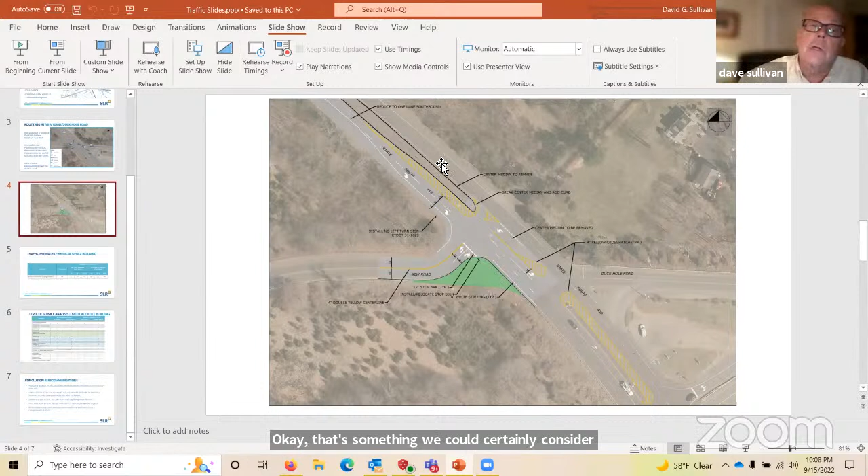So this is something that theoretically we could probably improve access to you and add a left turn lane here. It would still be a significant improvement. Yeah, that's all we're asking, just to consider that. Okay, that's something we could certainly consider. Thank you, sir. And we'll bring that up when we discuss this with DOT. Appreciate that. Okay. Thank you, that's all.

I don't have any more comments. Anyone with their hands raised, Madam Chair? Okay, great. Giselle, did you want to ask something? It looked like you might have been muted, but talking. Okay. I think then if there are no other questions, I don't know if we need to open up for public support and opposition, Erin? Sure, in case someone was holding back, waiting for questions to be finished. I don't see anyone raising their hands. I don't see any hands raised.

Okay, so could I have a motion then that we close the public hearing? Sorry, I just remind one opportunity in case the applicant had any follow-up comments in closing prior to closing the hearing. Thank you. I believe that we've responded to the questions and that the application in its full breadth complies with the regulation, and your adoption of the master plan moves us to the detailed site plan when we can get down to the nitty-gritty with the commission. So we urge your approval. Thank you.